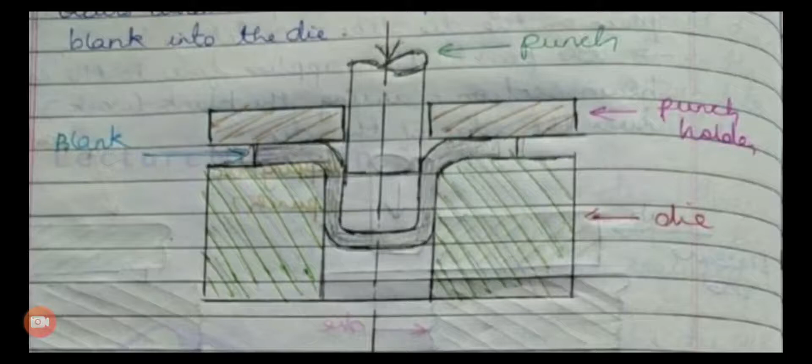Today we will discuss theory of drawing. It is a process of cold forming a flat sheet. Here flat sheet metal is placed in between die and punch, and it is pressed, so without much wrinkling, trimming or fracturing, the sheet is converted into a vessel.

The process involves forcing the sheet metal blank into a die cavity with a punch. The punch exerts sufficient force and the metal is drawn over the edge of the die opening. So in this forming, a cup is formed. The metal being drawn must possess a combination of ductility and strength so that it does not rupture.

There are some critical areas on the vertical portion of the punch. The metal in this area is subjected to stress that occurs when the metal is pulled from the flat blank into the die. In the figure you can see the punch holder is there, die is there, and blank.

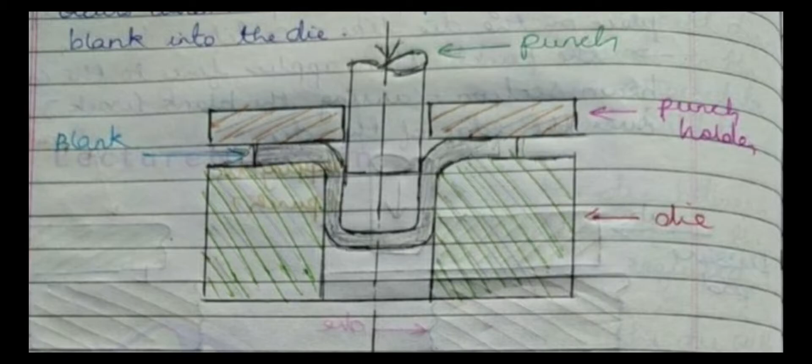Generally, the recommended clearance between the drawing punch and the die should be 1.4 times T, Z equal to 1.4 times T. The recommendation is given by this formula which you can see on the screen.

Z equal to T max plus K under root 10 T0. Here K is 0.07 for steel, a constant, 0.04 for non-ferrous metals, and 0.02 for titanium, and T0 is the original blank thickness. This formula is used to determine Z, which is the clearance. In previous lectures we discussed how clearance is calculated.

Now blank size calculation. Blank size calculation is the first step in the drawing process. While calculating, it is assumed that the blank surface area is equal to the surface area of the finished shell.

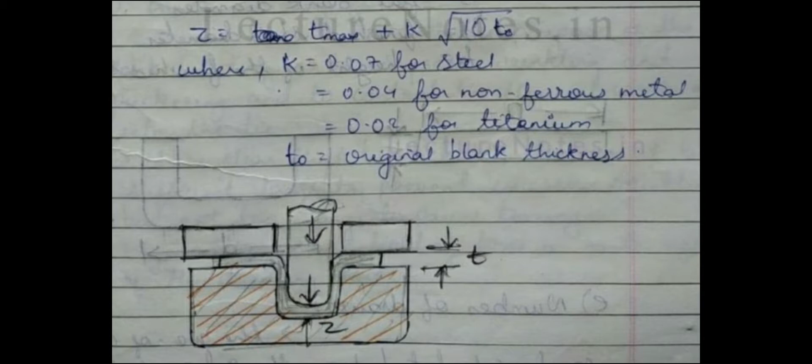This is given by the relationship d equal to under root d square plus 4dh, as shown on screen. Then for width, when d by r is between 15 to 20, the relationship is d equal to under root small d square plus 4dh minus 0.5r, and when d by r is between 10 to 15, then d square plus 4dh minus r.

So d is the flat blank diameter, small d is the finished shell diameter, and h is the height of the finished shell. This calculation is for drawing only.

When this blank sheet is placed on a die and pressed against the punch, this shape becomes small d, the finished shell diameter. Then comes the number of draws, how many draws are required.

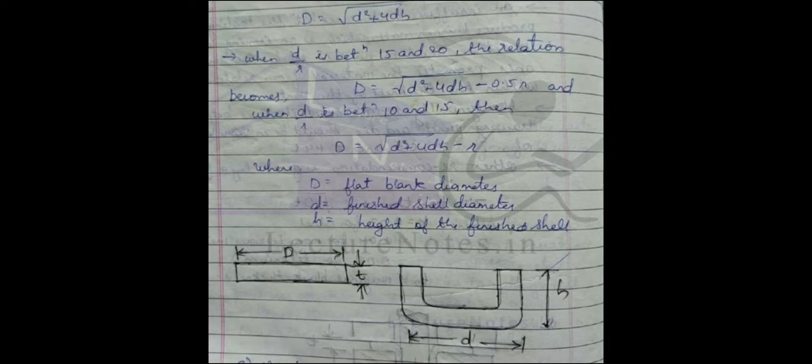The number of draws can be calculated from the ratio of the shell height to shell diameter as given in the table shown. If the height to diameter ratio is up to 0.7, the number of draws can be 1. If the height to diameter ratio is 0.7 to 1.5, meaning the height is more, then there should be 2 draws.

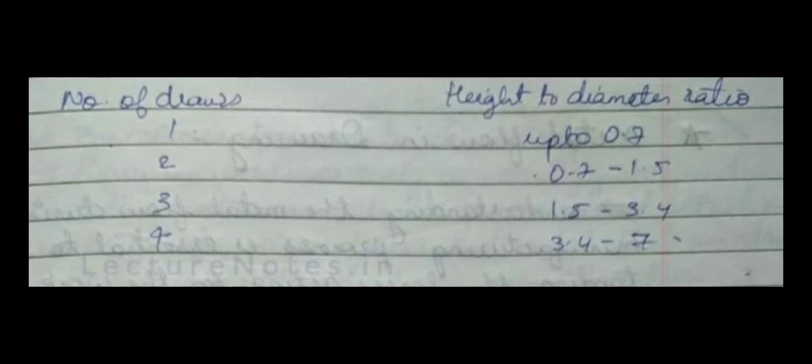If height to diameter ratio is 1.5 to 3.4, then there are 3 draws. If 3.4 to 7, then there are 4 draws. So in this way you can consider the number of draws. It depends upon height. If more the depth, more number of draws, more number of cycles you have to carry out.

Then force calculation is also important. The force required to draw a shell is given by the following relationship: F equals pi dt into sigma y, in bracket, D by d minus c. Here D is the blank diameter and small d is the finished shell diameter. t is the blank thickness, sigma y is the yield strength, and c is a constant which varies from 0.6 to 0.7.

Then blank holding force. This is also required to hold the blank firmly, but it is less than the cutting force or drawing force. The purpose of blank holding is to suppress wrinkling and control the flow of work metal into the die. The blank holder force must be sufficiently large to prevent excessive wrinkling but not too large to cause tearing. It should be sufficient but not too high a force.

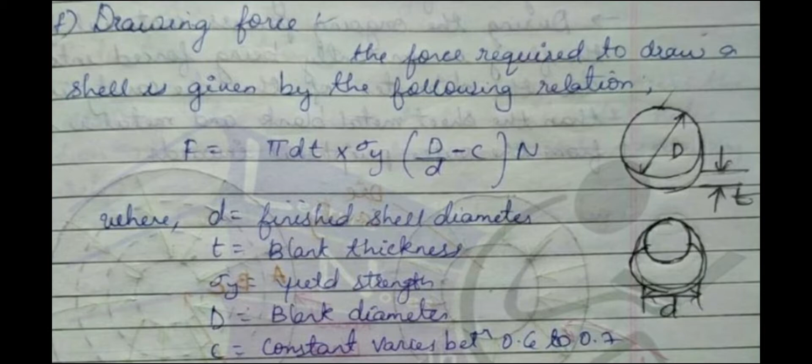Now, how does metal flow in drawing? During the ongoing process, material from the flange is constantly being forced into the die. The diameter of the die cavity is smaller than the sheet metal blank, and metal flows from the outer periphery to inward. In this diagram you can see the metal flow is from outer periphery to inward. So it is a round blank, and this is the die cavity. The metal flows into the round die cavity.

In the number of draws you can see the metal flow. It can be illustrated that more material is being forced into a smaller space, since the material from the periphery is moving into a circle of smaller diameter. As shown in the figure, as the drawing progresses, metal from zone A is forced into zone B, metal from zone B is forced into zone C, and metal from zone C is forced into the die cavity. This continues until eventually even the material in zone A is forced into the die cavity.

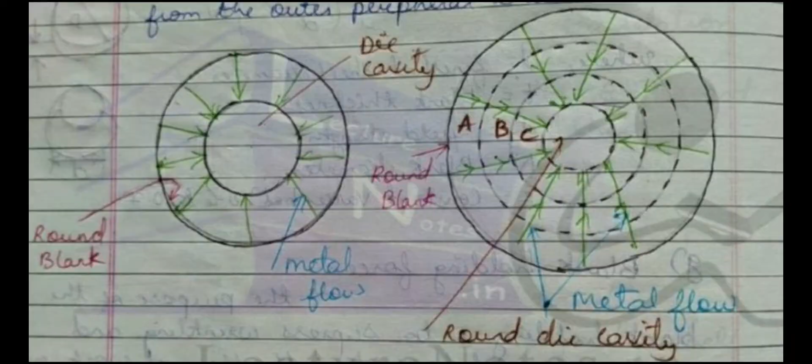While reducing this diameter or flowing of material, there is a reduction ratio you have to calculate. Another way to express the drawing ratio is the reduction ratio. Reduction is measured using the same variables as drawing ratio. The reduction ratio R equals dB minus dP divided by dB, where dB is the blank diameter and dP is the punch diameter. The reduction ratio should be 0.5 or below.

It is often expressed as percentage reduction: dB minus dP divided by dB, into 100.

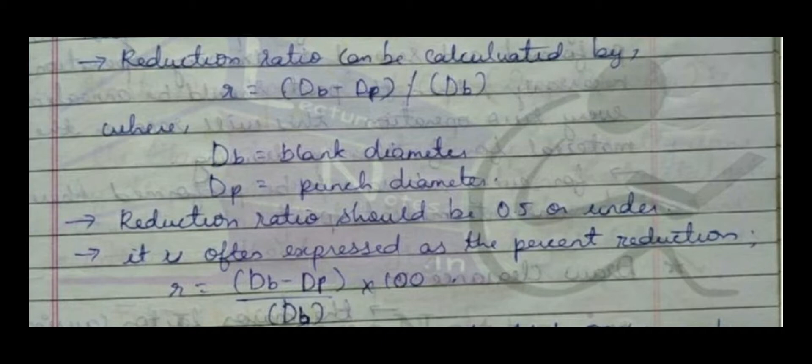In this case the reduction should be 50% or under. Reduction ratio in each draw, and blank diameter may be calculated as dRR1 equal to d minus d by d. There are cases DRR1, DRR2, DRR3: 45% to 50%, 30% to 35%, 20 to 25%. So it varies, reduction ratios are varying. D is the initial diameter of the blank, and D1, D2, D3 are required punch diameter during successive draw reduction ratios.

If you want to draw in multiple cycles, then different punches are used of different diameter. At each stage, the reduction ratio is different. So at first cycle, reduction ratio is 45% to 50%. In second cycle, 30 to 35%. And in third, 20 to 25%. In this way, successively you can reduce the diameter and increase the height or depth of that cup shape.

Okay, redrawing limits are also there. We have to consider redrawing limits. So redrawing limits are the amount of forming of the sheet metal that can be accomplished on the first redraw, which is less than on the original draw. So for the original drawing of the blank, 50% reduction is rarely used during manufacturing practice. The initial reduction is usually 35 to 45%.

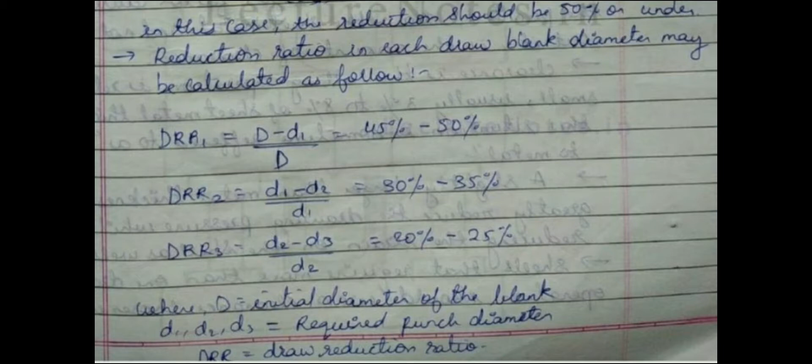As well, a shell that requires more than one drawing operation should use a clearance with regard for the material being drawn. Basically, guidelines for proper choice of such clearance are included in a table. So for material, different clearance is chosen. For aluminium, the clearance is 1.25 T. For steel, it is 1.1 to 1.2 T. For stainless steel, 1.75 to 2.5 T, where T is the stock thickness or sheet metal thickness.

Okay, so this is about drawing clearance. Then redrawing limits, then reduction ratios, and metal flow in drawing operation we discussed.

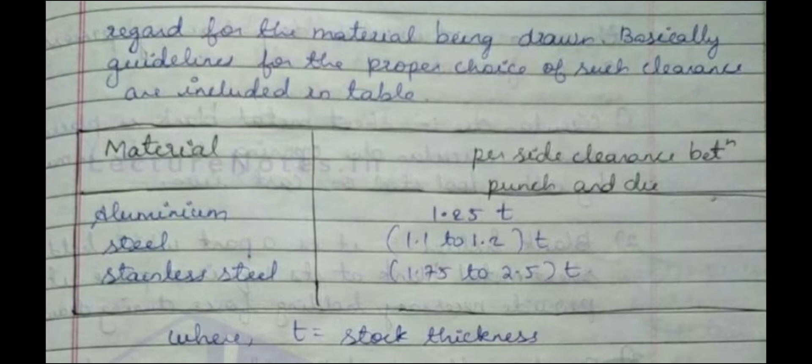Now let us discuss the blank development of cup, that is the deep drawing process. In last lecture also we discussed about the deep drawing process. The blank development of cup is largely done by deep drawing process, in which the sheet metal gets converted into cylindrical or box shaped structure with or without changing its length or thickness. So this is called the deep drawing process or cup shape.

So in the figure you can see there is a blank. This blank is under pressure. Blank holder is there, punch is there, die is there, and the finished product you can see at the bottom, the cup shape portion. The main parts used in deep drawing process are the circular die.

A sheet metal blank is placed over a circular die opening. This die is made of either tool steel or cast iron. The blank holder is used; it is a part which holds the sheet metal blank at its required place. It provides necessary holding force during drawing. Then punches are used, so this part provides necessary downward force at the blank. It travels downward and forces the blank into the die cavity to form a cup shape.

Orange peel: when the metal is stretched, it loses its shine surface produced by rolling. The stretch causes the surface to become dull, and a dull surface is said to have an orange peel appearance. So it loses its surface shine, and it is called orange peel.

The wrinkling in the flange: wrinkling in a drawn part consists of a series of ridges that form radially in the undrawn flange of the work part due to compressive buckling. So this is wrinkling of the flange.

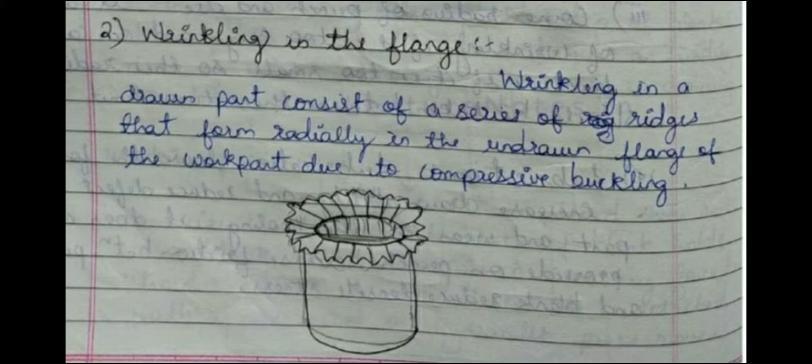Then wrinkling of the wall. If and when the wrinkled flange is drawn into the cup, these ridges appear in the vertical walls also, and this is called wrinkling in the wall.

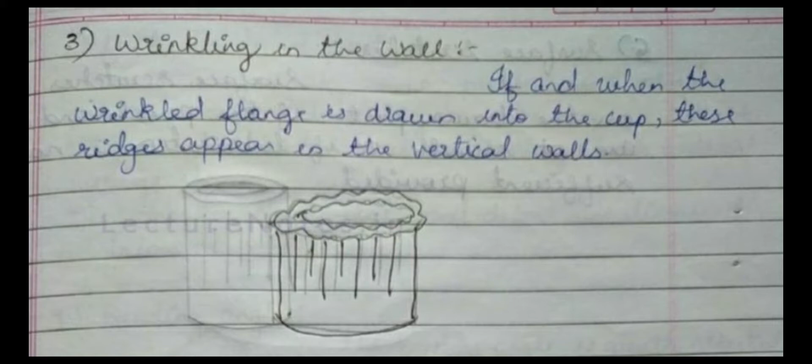Then tearing: tearing is an open crack in the vertical wall, usually near the base of the drawn cup, due to high tensile stresses that cause failure of the metal at this location.

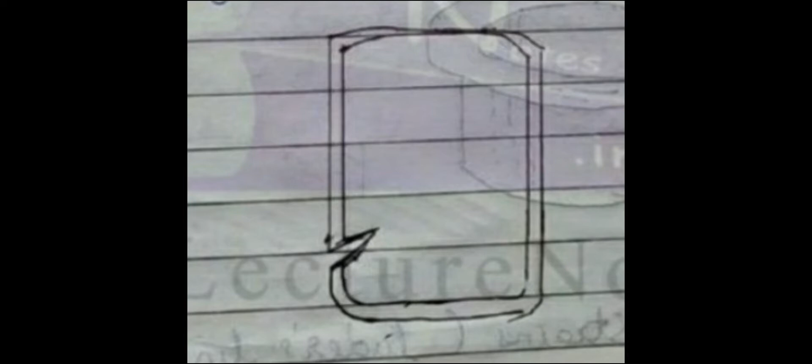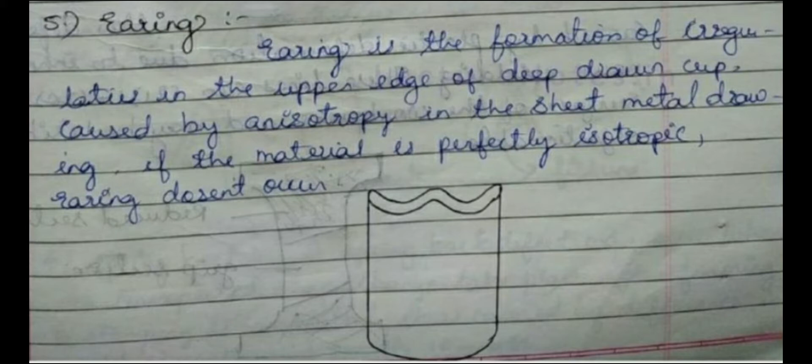Then the next defect is earing. Earing is the formation of uneven shapes at the upper edge of a deep drawn cup, caused by anisotropy in the sheet metal. If the material is perfectly isotropic, earing does not occur, so in some materials it does not occur. It causes an uneven surface at a particular top of the cup.

Then surface scratches. Surface scratches occur on the drawn part if the punch and die are not smooth, or if the lubrication is not sufficiently provided, then surface scratches occur.

Then misstrike. Due to the misplacement of the stock, unsymmetrical flanges may result. This defect is known as misstrike, resulting in unsymmetric flanges.

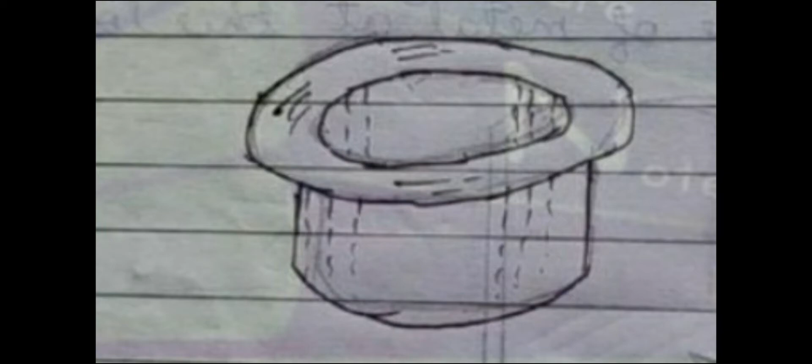Then stretcher strains, reduced section and grip section. This defect is caused by plastic deformation due to inhomogeneous yielding. These lines can crisscross the surface of the workpiece and may be visibly objectionable.

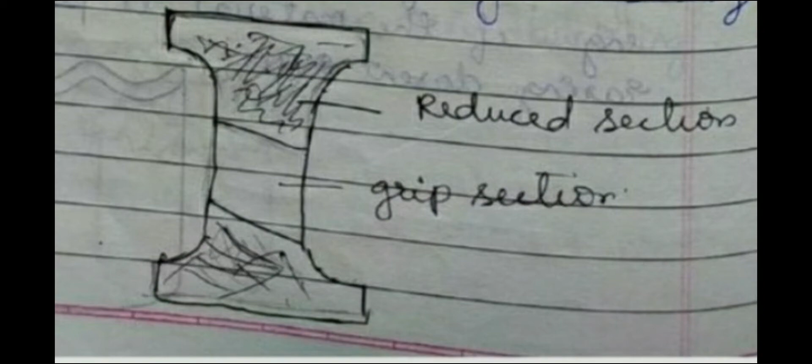So this is about defects in drawing, not bending. The bending process also has some defects, such as sheet thickness variations. Many defects can be found in a bending die. We'll discuss these bending defects and other portions in the next lecture.